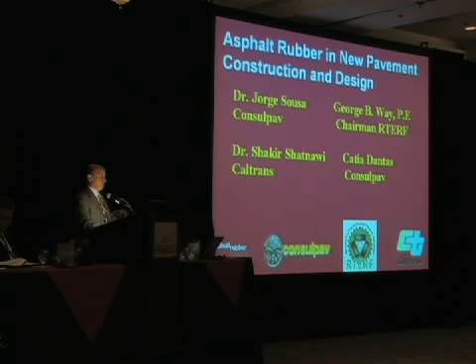Before that, I need to acknowledge that this work was done under the guidance of Dr. Shakir Shatnawi, Jorge, and Catia, who is an engineer. What we're trying to address here is the concept of how can we use, or should we use, asphalt rubber in new pavement construction. I think we need to look at everything we know and take a step forward.

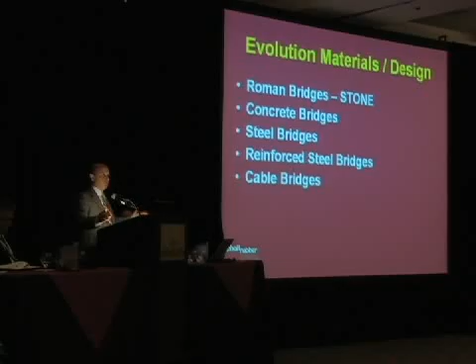Think about what has happened with bridges, for instance. The Romans did bridges. They had stones, they had arches, and they had a design method adapted to the material they used. Then we invented concrete, and our bridges have been designed taking into consideration the material we have. Then Eiffel and others started making steel bridges and towers, with design adapted to take maximum performance from the material. Then they invented reinforced steel, and we have the reinforcing method in the curves of the rebars.

We have moved forward because now we have a new material, we have adapted design. Then we have the cable bridge, now the Golden Gate and many other stay cable bridges, because they have these super fantastic steels and epoxy coatings, and you can take advantage of that in design. Now, I think it's time to start thinking if the designs we are using now in our normal construction are really addressing the capabilities that we now have in the materials.

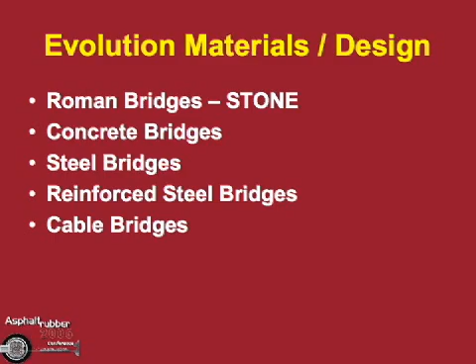Now, we have gap grade, open grade SAMI, and we have been using them, and we have design guides, but are we really taking advantage of these materials? Do we have an adopted reflective design method to take advantage of the materials? Clearly, we don't, and I'm going to demonstrate.

How can we take advantage of the extra durability of these materials? How do we incorporate in our designs the fact that a SAMI does really waterproof the pavement and water does not go in, so we don't have as much of a weakening effect from moisture in our pavement? How do we incorporate all that? Are we missing the boat here? Shall we start thinking outside the box?

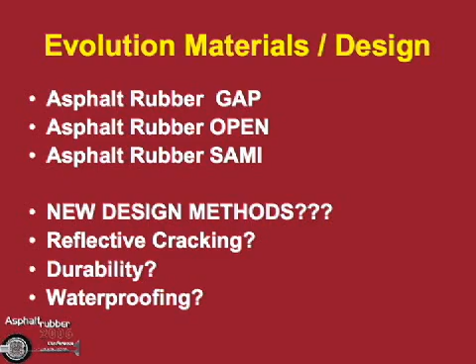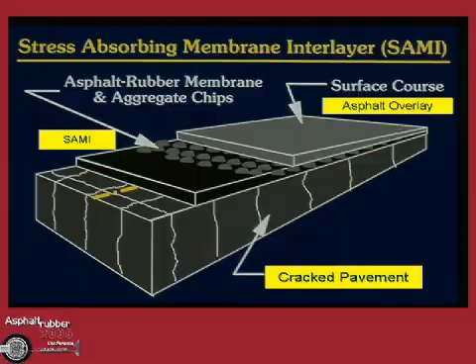So we know, and it has been well reported, that SAMIs, like Dr. Shatnawi said, work great. Now, how do we incorporate this 'work great' into our knowledge? How can we push the limits? And how can we also incorporate the limits given to us by these gap-graded and asphalt rubber mixes?

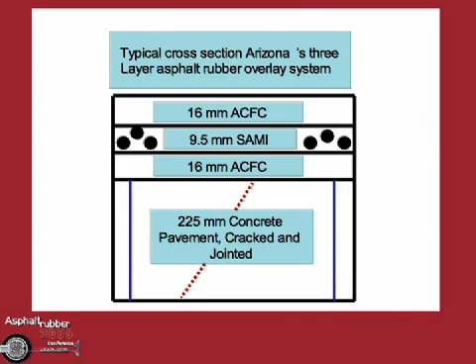Arizona started doing some tests many years ago, and they tried new concepts to resist reflective cracking by putting asphalt friction courses, then a SAMI, then asphalt friction courses again, trying to make it waterproof and crack resistant. They actually did finite element analysis at the time. And look at this -- they realized that the stress at the crack tip with SAMI versus no SAMI was tremendously different.

But we have this map, we look at it, it's different, that's okay, and then we go home. How do we incorporate this knowledge into our designs?

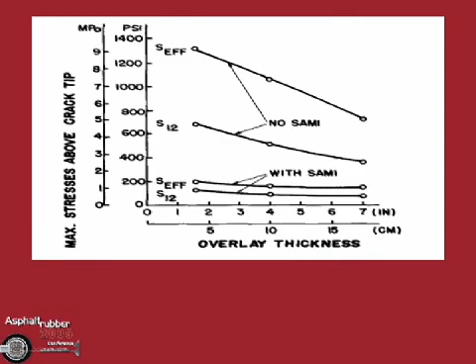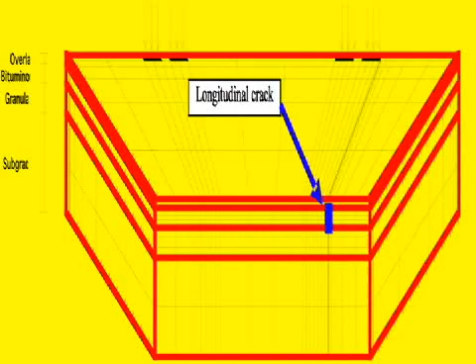Later came work that Jorge Pais, I, and George Way did for RPA, trying again to incorporate the reflective cracking design mechanism into normal practice. We get good correlations, and the model correlates very well. Don't worry, the important part here is to know that there are tools. And the tools seem to indicate to us that reflective cracking is the key aspect that must be controlled in overlays.

Okay? Why don't we think that a new pavement is all cracked, make a pavement all cracked, and control the reflective cracking? Now, this is a new, different way of thinking.

What we do so far is control the stress on the top of the subgrade layer. We control the stress on the bottom of the asphalt layer, like the Asphalt Institute teaches us to do with the shell method. But if we have this material that is so good at resisting reflective cracking, why don't we control that stress instead? You'll see where I'm going with this.

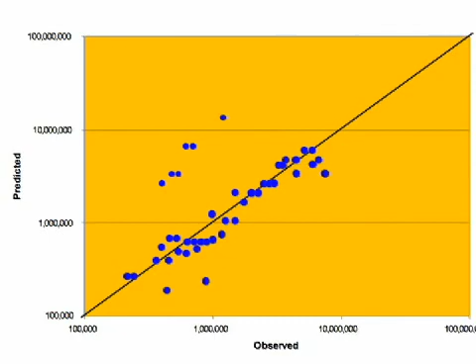Now, through that method, we have developed a way to control reflective cracking and relate overlay thickness with the number of ESALs that a certain pavement can take, as a function of the pavement conditions, layers, and moduli. Interestingly, the model tells us that asphalt rubber layers can take less thickness for a given traffic.

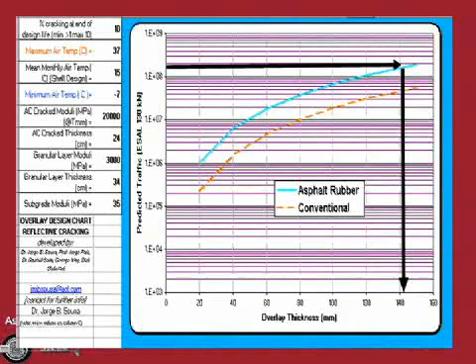Now, remember when I made this comment this morning regarding ALF? I think this ALF study is a fantastic basis to start thinking all new about designing pavements.

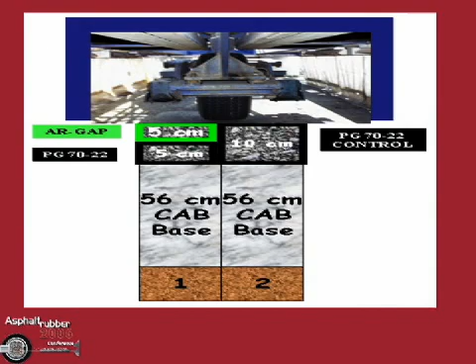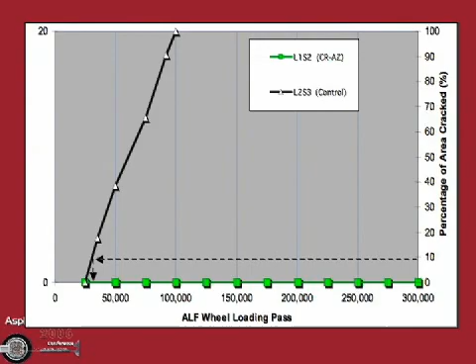We know, it is reported, that we had at least these two materials, conventional and asphalt rubber, and it was reported that one did not crack and the other cracked. Now, first, I want you to think that the difference in price in these two materials is not tremendous.

I made an analysis for China, and if you design a pavement with this traffic, it costs maybe 20 RMB, the unit, forget, $20, let's say, for 1,000 trucks. If you use this structure based in this graph, you basically take the same amount of traffic with $2. It's a 10-to-1 difference.

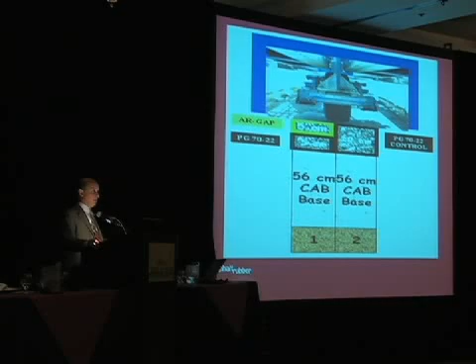Now, when we have a pavement like this, they all alike, this one is lasting so much longer and this one doesn't. Can we predict this? Can we design this? This is a new pavement. Why don't we make all new pavements like this? We're saving tremendous amounts of money.

Well, we know that this lane did not crack, that one all cracked, so this lane on the bottom is cracked, that's not cracked, the cracks don't come through. Now, what we do now is we control the crack on the bottom of that layer, and the base here and the base here.

So, based on our current design methodology, this pavement is no good, because on top of it, that layer there is softer. So, from all methods of designing pavements today, this thing is going to crack and fail before that one. But the reality is absolutely the opposite.

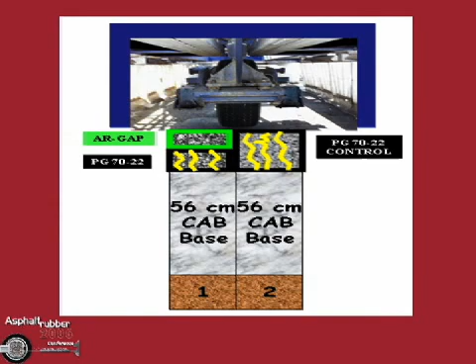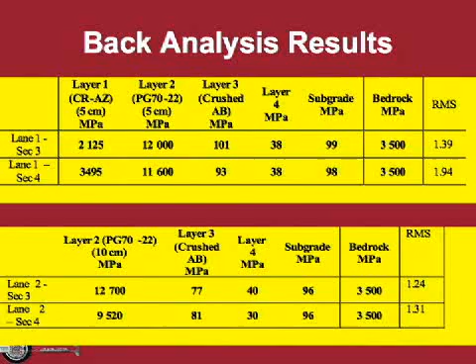Now, we took the time, and FHWA is very gracious and sent us all the FWD data, all the data that they could, and we did the analysis, back analysis, and we calculated the moduli of all the layers, using Shell, and this can be done using Asphalt Institute or using any normal method, but Shell worked well.

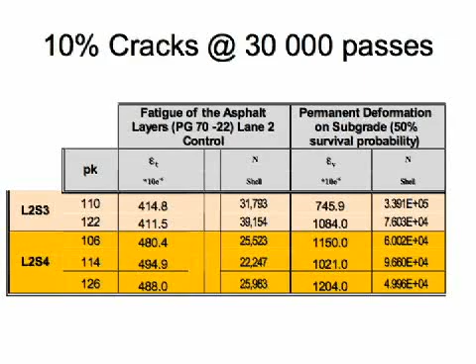We predicted, using the data that they sent us, that the different sections, well, there's some variability. Some would fail after 22 cycles, some 35 cycles, and for 10% cracks, the reality is that it failed in 30,000 cycles. So this is this section.

We were able today to predict how this section behaved, very well. So meaning, up to today, researchers, engineers particularly have done a good job. The models we have can predict what happened at ALF.

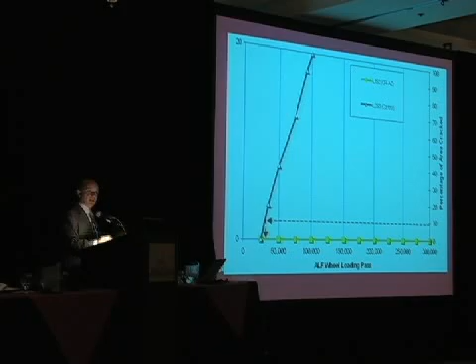Now, the same models tell us that the asphalt rubber section should have failed after 8,000, 12,000, 22,000 cycles. The same models tell us that.

But the reality is, after 300,000, it didn't fail. We could ride that surface, it's a beautiful surface. If the whole road was like that, we'd have no cracks.

So, we need to go back and rethink how we do pavement design, because we want that performance. Why are we going to bury more money? We want that performance.

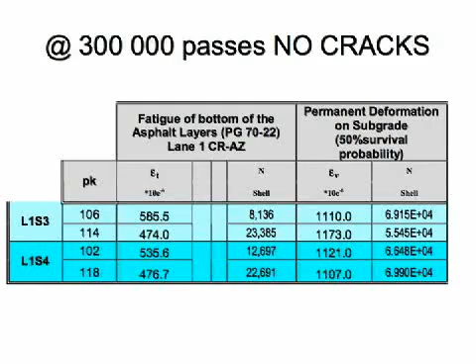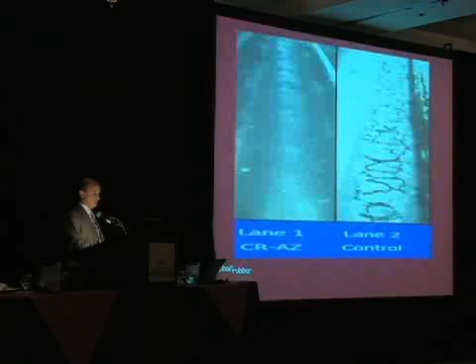Now, here is just an idea how we can get there, but using the overlay design method that was done for RPA, we can imagine that there's an overlay, the pavement, as you just, so we don't lose you for a second here, remember there are 2 layers here, and actually that pavement was made in 2 layers too.

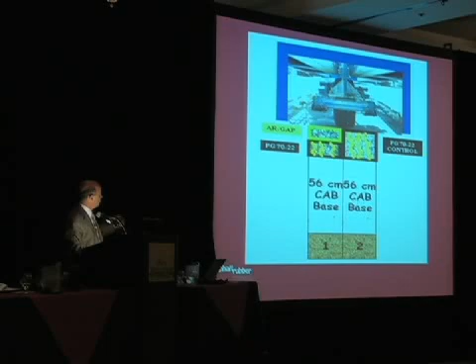So these 2 layers, let's imagine that this is all cracked, and now how long does that one take to resist life, like that one, resist cracking? So here we can see that one would fail in about 15,000 passes, like the conventional mix here.

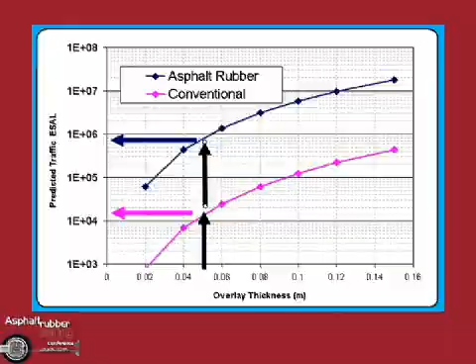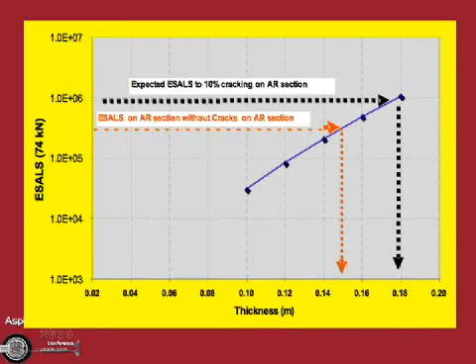So, interestingly, if now we know that those 5 centimeters of asphalt rubber would make the pavement last that long, we can now go to the model and see that the thickness of equivalent asphalt, if it wasn't asphalt rubber, would be asphalt, how much would be? And it turns out 18. And this one, for the exact cycles, let's imagine that this went 300 cycles and 301, everything was cracked. So the equivalence in that case would be 15 centimeters.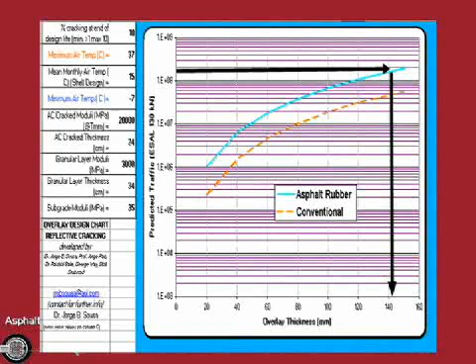Going back to the considerations in China, where we have a tremendous amount of traffic, you want to overlay a pavement that, for the conditions there, we got to the conclusion that we needed 14 centimeters of asphalt rubber. I know this is unthinkable, you never thought about putting 14 centimeters of asphalt rubber. But the alternative would be much more, designing a pavement for those heavy loads.

So then the concept came that why don't we make new pavements that actually can crack, and they are cheap. Making new pavements with cement-treated bases in China, they have very poor aggregate, so everything is cement-treated. You can go heavy on cement and let them crack.

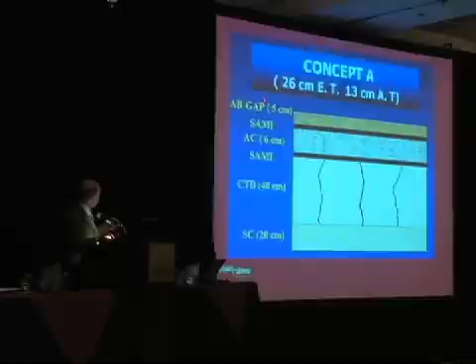Shrinkage cracking, not from, no, this is a strong pavement. The resistance and strength is given by these layers. Then just consider putting on top whatever it takes, the minimum asphalt rubber combination to resist crack propagation. In this case, we considered a SAMI, 6 centimeters, another SAMI, and 5 centimeters gap graded, which gives you 13 centimeters of actual binder layers, equivalent to 26.

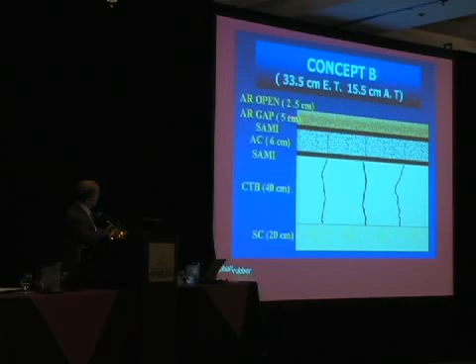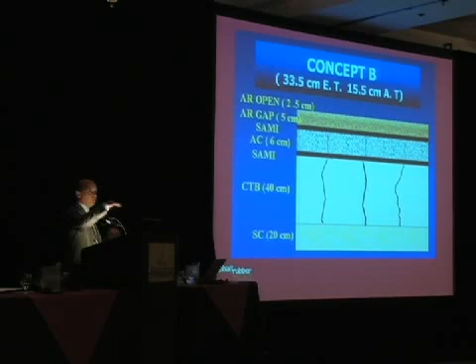Or in another case, where we are on a freeway, we can put the open grade, and in fact it's like having 33 centimeters of asphalt rubber in equivalent thickness, but in fact we have 15.5. So what I'm trying to demonstrate here is that by having these materials, SAMIs, gap grades, open grades, beyond the fact that they are smooth and have no splash and save lives...

Why don't we think of them as a new material that can be used to control reflective cracking, and design new pavements where there are lots of cracks to be reflected, but we prevent them from reflecting. Therefore, we have fantastic surfaces, and by the way, the cost of this pavement structure, at least for Chinese conditions, was a fraction of the normal pavement structure they use for the high traffic considered.

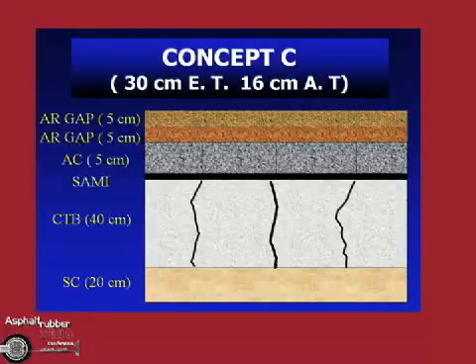And this is another concept. By the way, the concept of putting the two SAMIs here is to make sure that water does not even come to this layer, so there is no effect of pore water, pore pressures, and this material is always in a dry condition, while these materials on top can breathe and dry out. So just some other secondary aspects here.

So I think that over this paper and what you saw today, we can conclude that asphalt rubber can be used to reduce reflective cracking. Asphalt rubbers and SAMIs are not adequately modeled in any of the current design procedures. And we need to think about where we're going to go next with our research, because by not using these materials, we're truly bearing more and more cost in these roads.

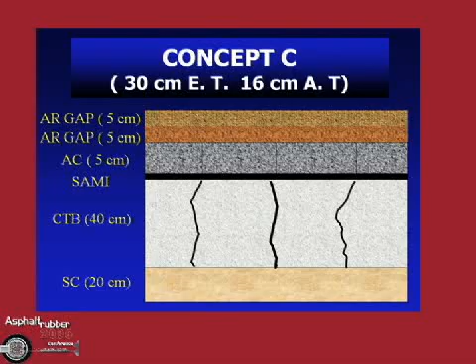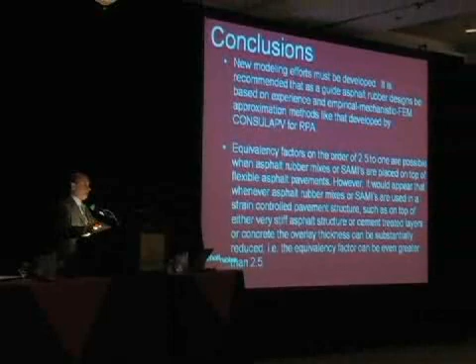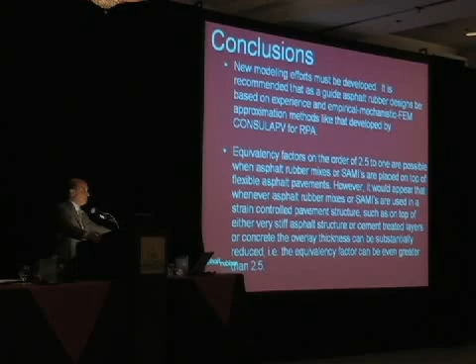And the equivalency factors are actually kind of a function of how much in strain control a pavement is. I know this is getting deep, but the more in strain control a mix is, the better asphalt rubber performs. The equivalency factors can go as high as 10, like in the laboratory reflective cracking tests that Caltrans has done. If you have pavements in those conditions, the overall benefit of having asphalt rubber is enhanced.

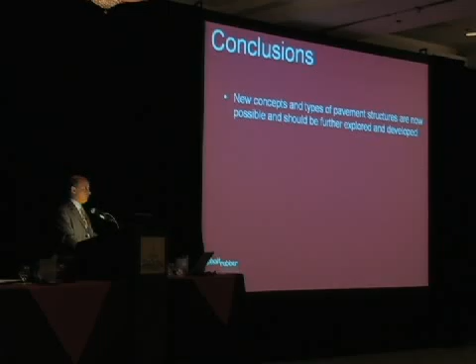And now finally, new concepts can be considered using these eventually new design methods in which we control reflective cracking as a new design control.

Just want to throw this out to everybody, because I get really confused, and I'm sure everybody who starts learning about this gets confused with all the names in Caltrans, Texas DOT, and everybody having a name for this. So I propose some names: for the gap grade, asphalt rubber optimized stone mastic asphalt, because out of all the possible SMA gradations, the narrow band of the gap grade used in Arizona is optimized over generations of trial and error.

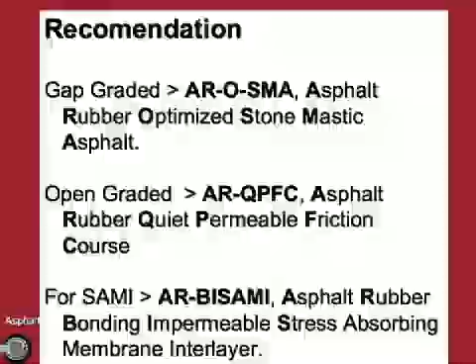For open grade, I propose the asphalt rubber quiet permeable friction course, because that's what it actually is. And for SAMI, I know the name has been around so long that it's difficult to evolve from it, but in reality an asphalt rubber SAMI is an asphalt rubber bonding impermeable stress-absorbing membrane interlayer. We kind of forget the bonding part because it's very tacky and impermeable. I think it's important to add this to the name to make sure we're clear about what we're talking about when we discuss these asphalt rubber membranes.

So with this, I'm ready to be shut down by all these crazy ideas.

Caltrans limits the thickness of the rubber to a maximum of 60 millimeters. Have you had any experience with a thicker layer in its stability? I understand Arizona has done up to 75 millimeters on I-10, and tests at Arizona State with confinement, using SuperPave performance testing, have shown that these mixes are actually very stable when confined.

So I have no reason to believe they won't be stable even if thicker. Now, what people think is that using more asphalt rubber may not be cost effective. That's another area that needs to be explored, because the models used so far to make that determination didn't work.

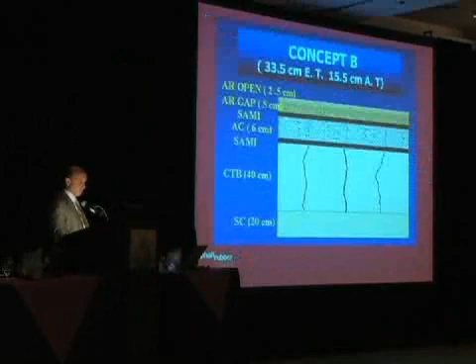We cannot forget that we're trying to make a pavement to protect the subgrade, so we need to distribute those loads. When I was presenting the concept about these new pavements, I was considering reducing the thickness of the overlays by making sure we have a good base, cement-treated base or others.

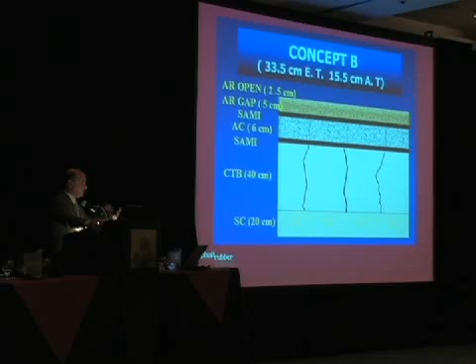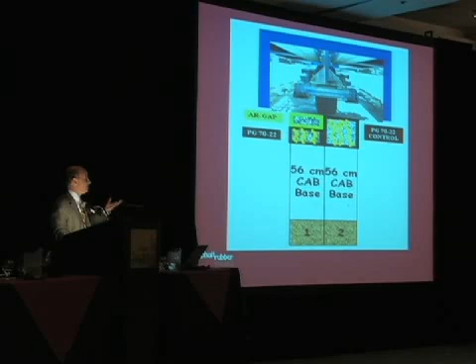But I want you to also think about the performance from the ALF, where you actually had a pavement of equal thickness to the pavement you have, about 4 inches of asphalt layer. As a new pavement construction, people right now are afraid of putting the top 2 centimeters because it reduces the stiffness, yet you actually have much better performance. So we need to control that.

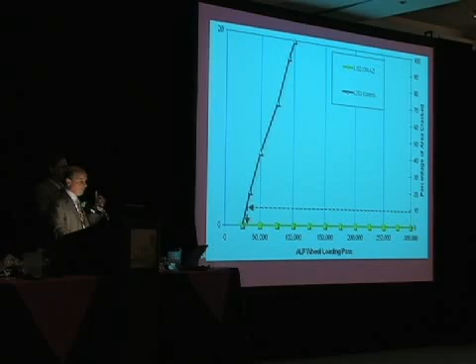Very good for bringing that question. I'm glad you brought it up, because there's a point here that I forgot to bring up. Okay, look here.

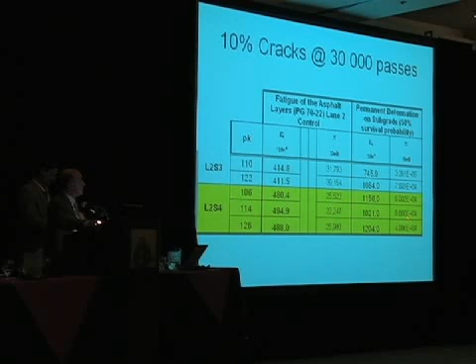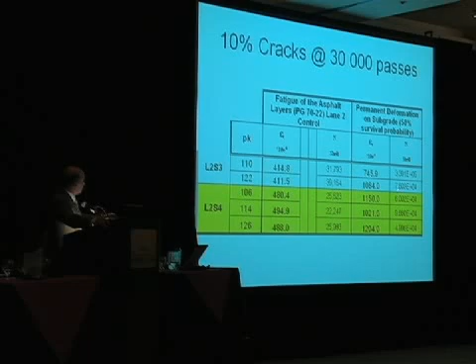I just mentioned the fatigue. The fatigue crack on the conventional material was matched by our expectations for fatigue. The model worked well as a model for the permanent deformation in the foundation. Now, please, I forgot to mention this part, stay on for one more minute. So you see, this matches pretty much. This is a pavement that would last pretty much the same amount.

Now look what happens in the asphalt rubber section. According to this model, because this is a softer section, this pavement would not survive. This lasted 69,000, 55,000, 66,000 cycles. After 66,000, this pavement would be failed by the foundation, according to our models. This is the same model you're going to be using to judge the thickness of that overlay.

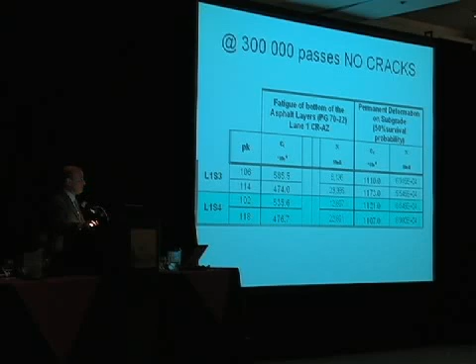But in reality, we didn't have a foundation problem. We went 300,000 cycles, more than 4 times what this model predicted, and nothing happened. So again, are our models correct? This is why I asked if they had done any IRI tests, to check if maybe it was bumping, but no, nothing funny happened in this foundation.

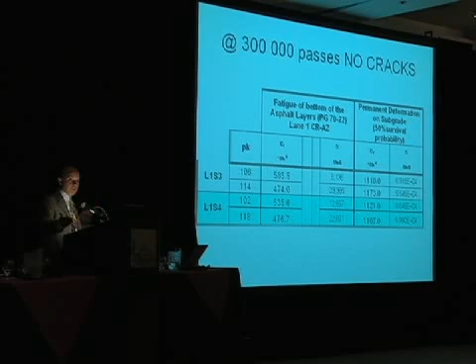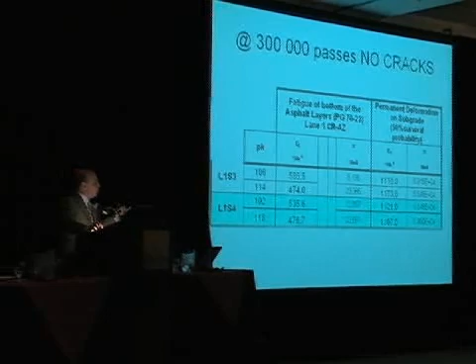Truly, I think your question is very good, because you are putting the finger in the wound. How can we reduce this using asphalt rubber and have our pavement still last? Remember, all our design methods have been calibrated by empirical methods, assuming the performance of a conventional material. But in these mixes, water doesn't go through if you have a SAMI, for instance. So all our experience with pavements that somehow let water drip in and weaken the foundation goes down the tube.

Sorry, no more talk.